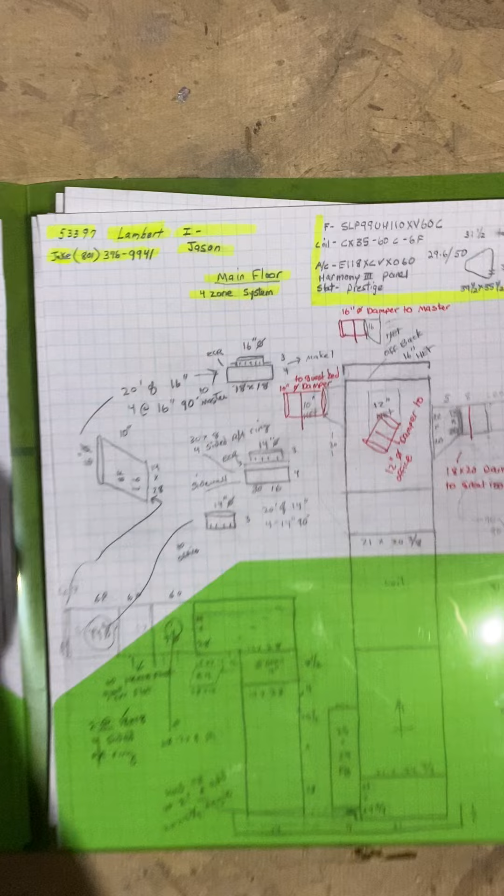Okay, this is on the Lambert job, number 53397, installed by Jason. Main floor and the basement. This is a Magleby home. So I'm doing the main floor first.

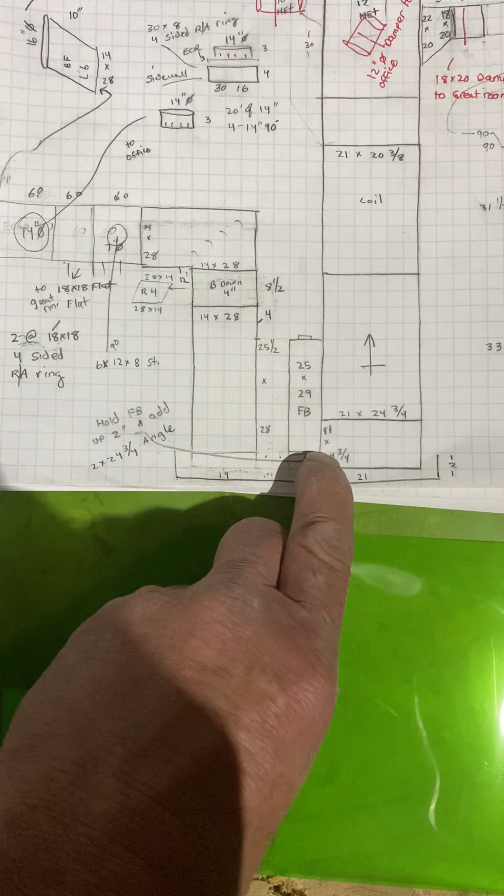The existing furnace is right here. The new one is going to turn and face north. Okay, so we're going to have the furnace, 25 by 29 filter box. It's going to sit on an 11-inch base. Raise the box up 2 inches so we can change our filter. I'll make you an angle right there.

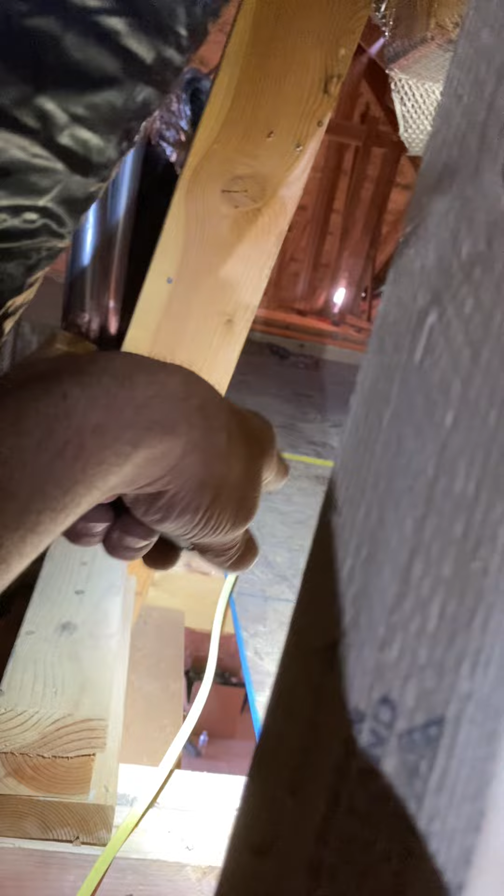Then you're going to have this 90. Going to offset back 4 inches right here, and then the 90 on the top. And your ductwork should sit back 4 inches right here, tied against this wood. And you just have straight duct, I forget how long, but to the back there. Then you have a square-to-round, and run one return,

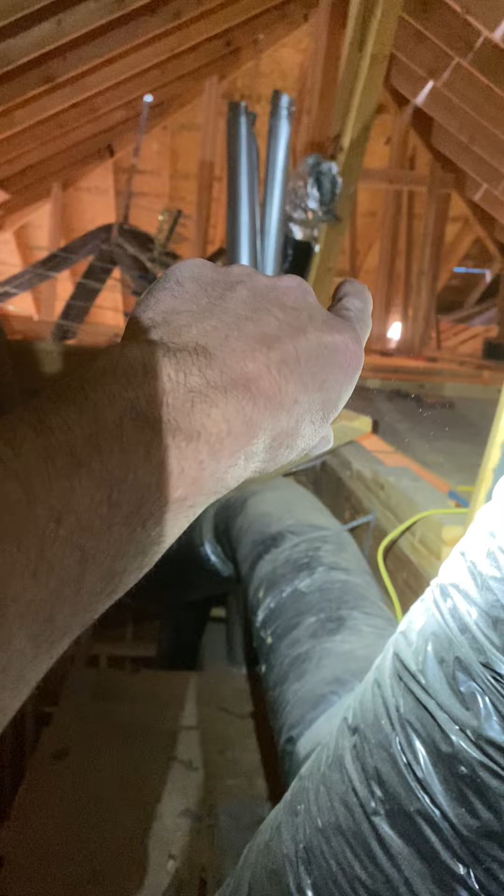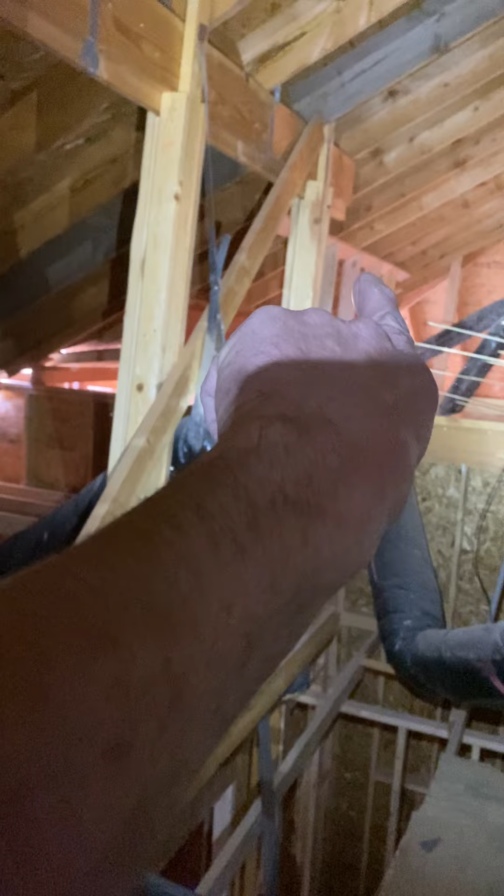14-inch up the end to an 18 by 18 flat grill in the great room. And you run another one to a sidewall, high, 30 by 8 sidewall flat grill, high. And I just gave you a big pan, so just ductboard the headers.

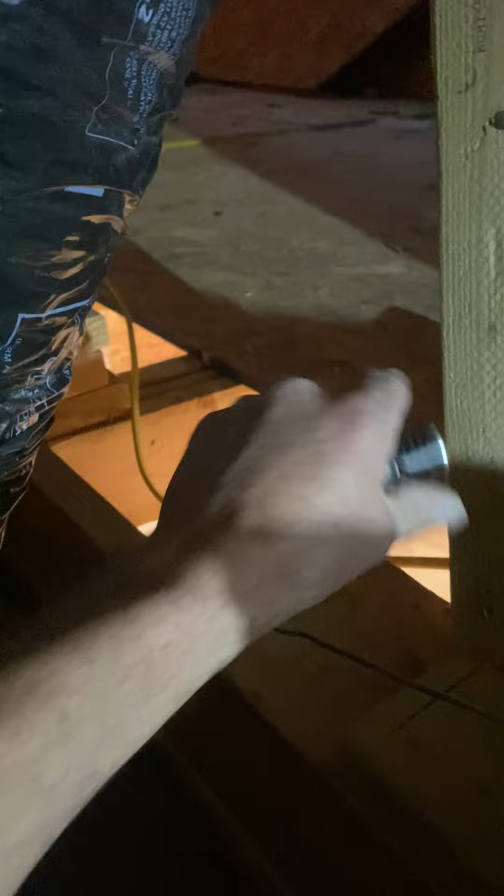You'll have two 18 by 18, so you're just going to cut out the bottom of the duct and cut out the bottom of the floor and put two 18 by 18 4-sided return air rings down and put ductboard on both sides. Okay, so this is a 4-zone system. Duct just as it shows.

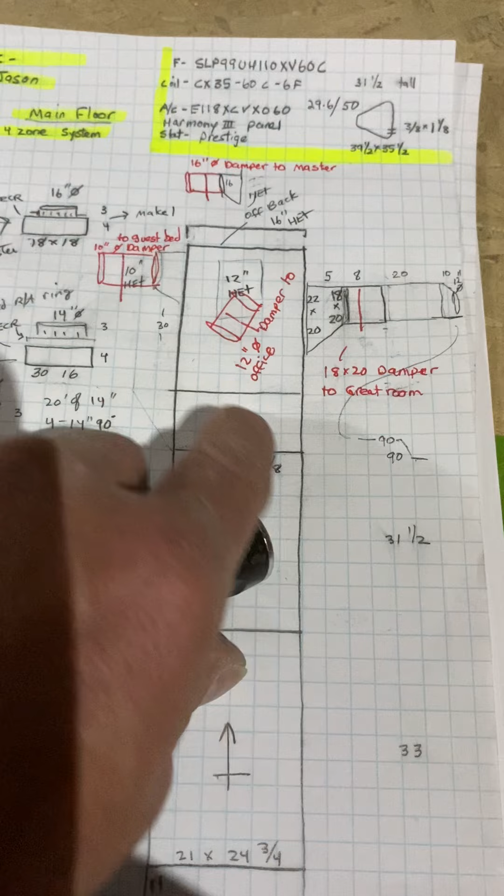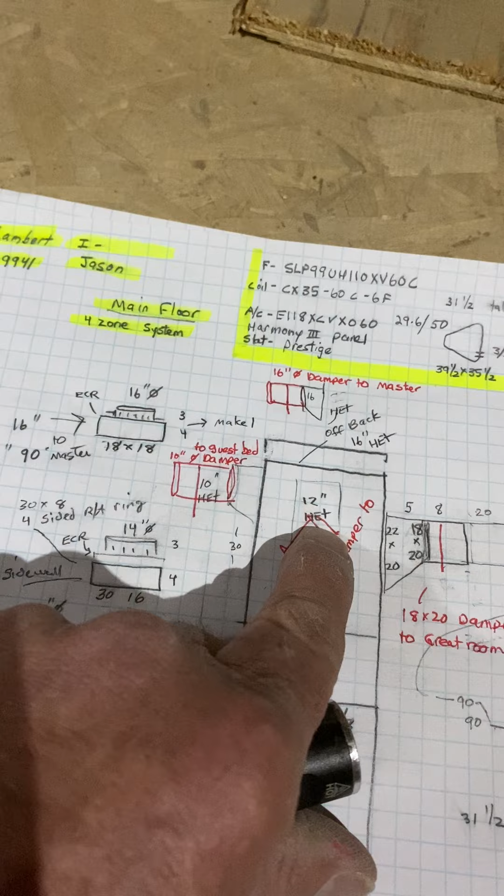Let's see, what is this? Oh, I'll have to erase that. I changed my mind. This is just one piece, 30 inches tall. But you have a 10-inch HET going this way with the 10-inch round damper. 12-inch HET coming up the front with a 12-inch round damper. A 16-inch HET coming up the back with a 16-inch round damper.

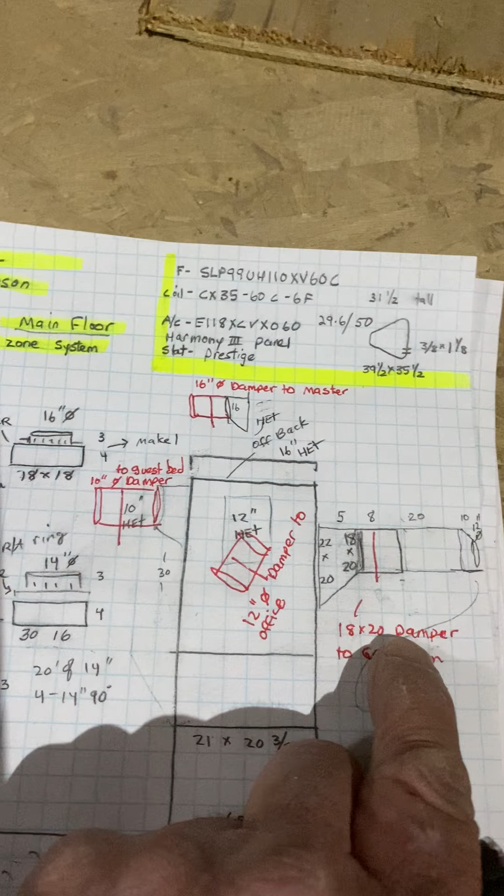Here you just have a 45-degree starting collar and an 18 by 20 damper here. Then I have a little piece of duct, then a square-to-round, and you have to kind of put a 90 and angle down, because the roof comes like this, you know.

Quick question on this washer dryer.

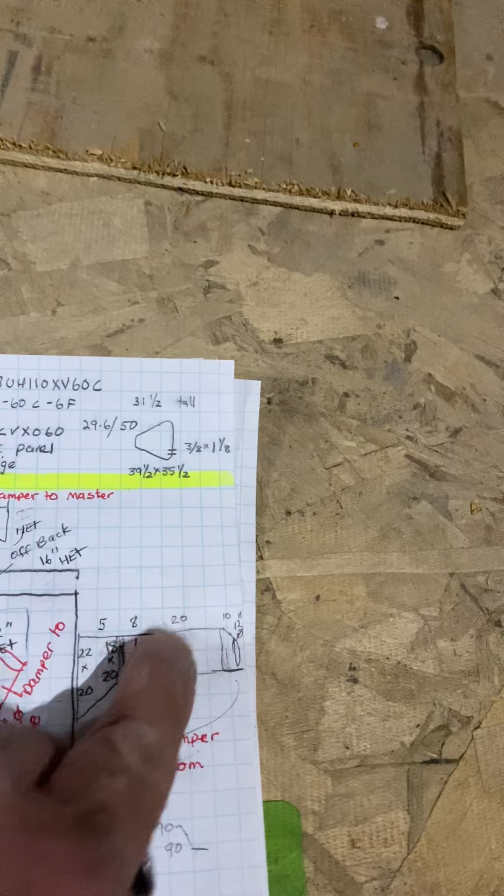But, and then coming off this back side, you will have a square-to-round starting collar to go to all the great room. Okay.

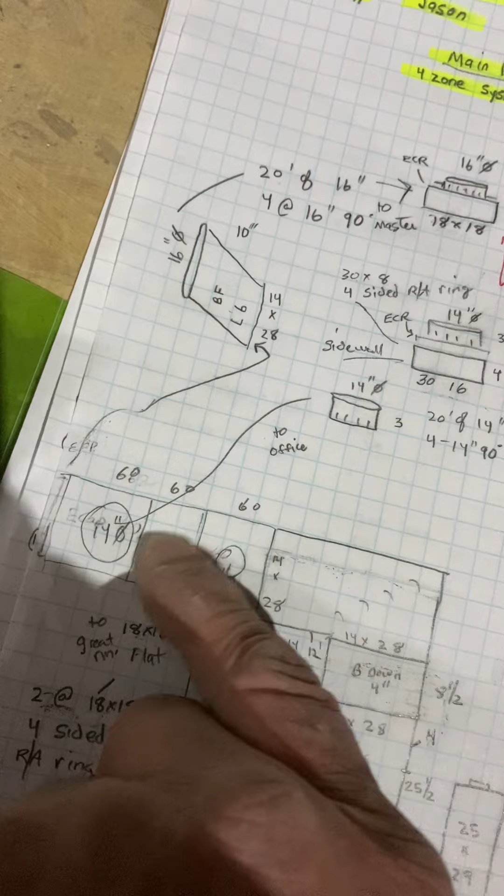So return air: 18 by 18 to master, 30 by 16 to the office, and then we'll just have a 7-inch round going to the bedroom return to a 6 by 12. I think that's what I wrote. Yeah, 6 by 12 by 8 straight boot. Everything up here is hard pipe. No flex on this job. So combustion air not applicable.

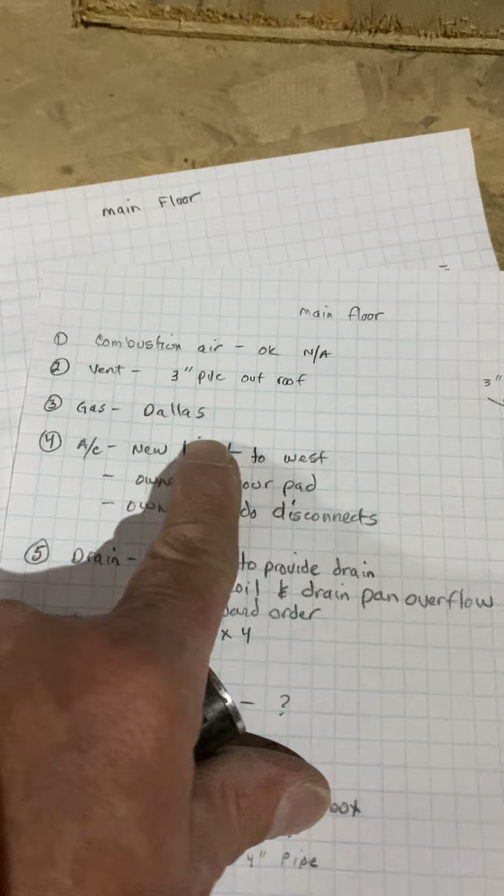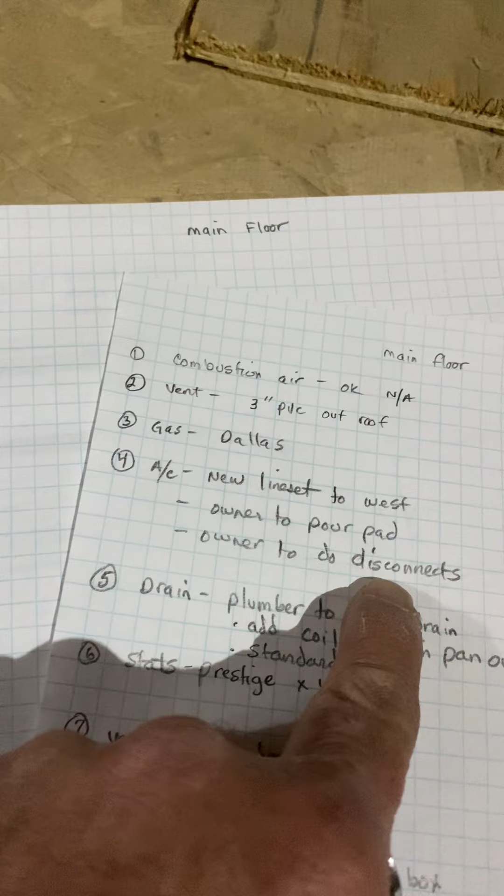The vent, 3-inch PVC through the roof. Just gonna take out this and you're gonna run ours to a concentric with the new roof flashing and stuff. The gas will be Dallas. AC, have to run a new line set to the west, over and then down the wall. The owner's gonna pour a pad out there. The owners will provide the disconnects, electrician will.

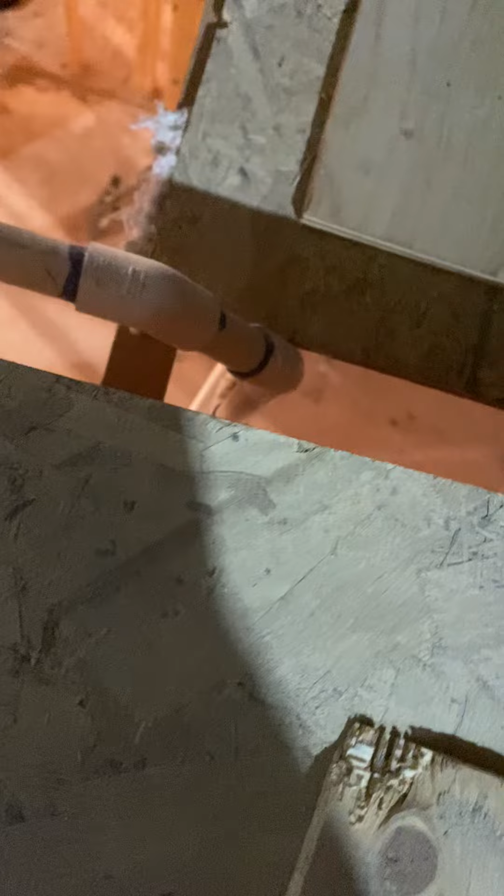The drain, so I talked to the plumber. Right now we just have a 3/4 inch drain going down right there. I told him we'll have a drain pan and everything. He's gonna bring us up a 3-inch P-trap so we can drain our drains into it. Add a coil and drain pan safety overflow switch.

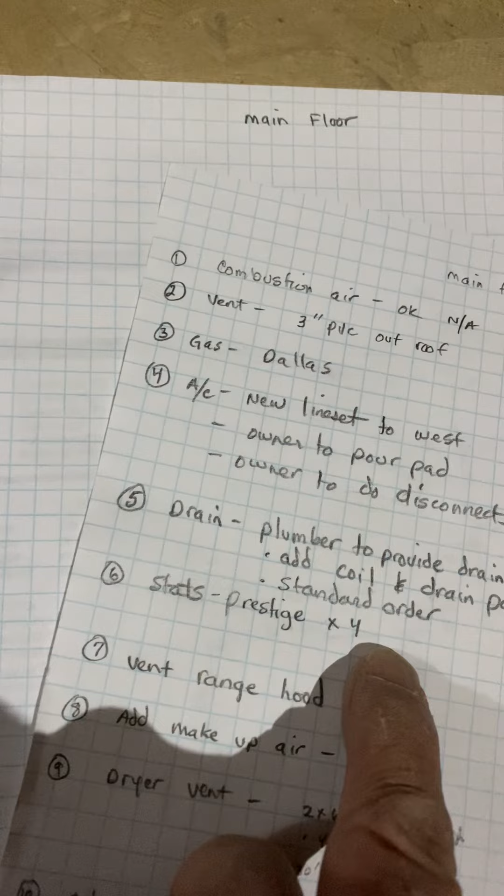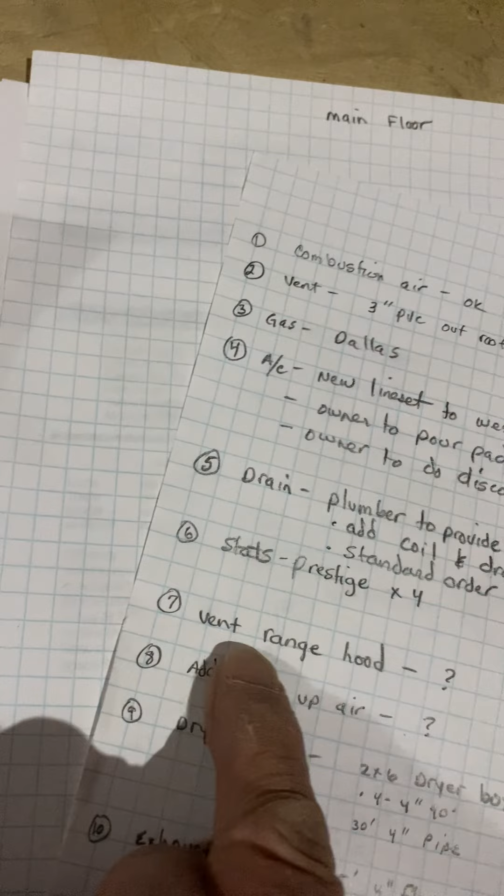Thermostats, 4 Prestige on each furnace. Gonna have a Harmony 3 zone panel. Vent, the range hood. I don't have any information on that. We don't know what size it is. Or the makeup air. I don't have any info on that either, or what we're doing, so.

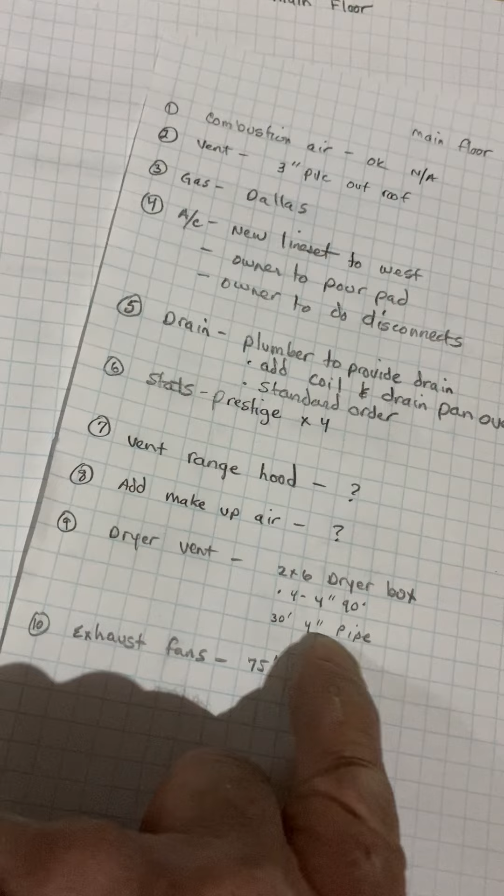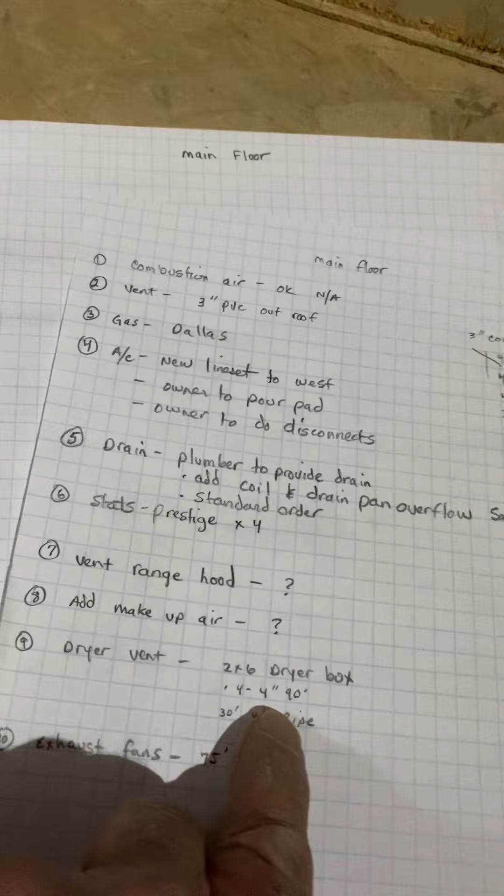Dryer vent, I'll give you a 2x6 dryer box, some pipe and 90s. I'm not going to order you the outside terminations because I'm not quite sure what they want, so we'll order those as well as the grills on trim out. I don't want to order grills and you need to change things. Exhaust fans, I'll just give you 75 feet of 4-inch flex and run the exhaust fans as needed. So, okay, let me put this back together and we'll go downstairs in a minute.

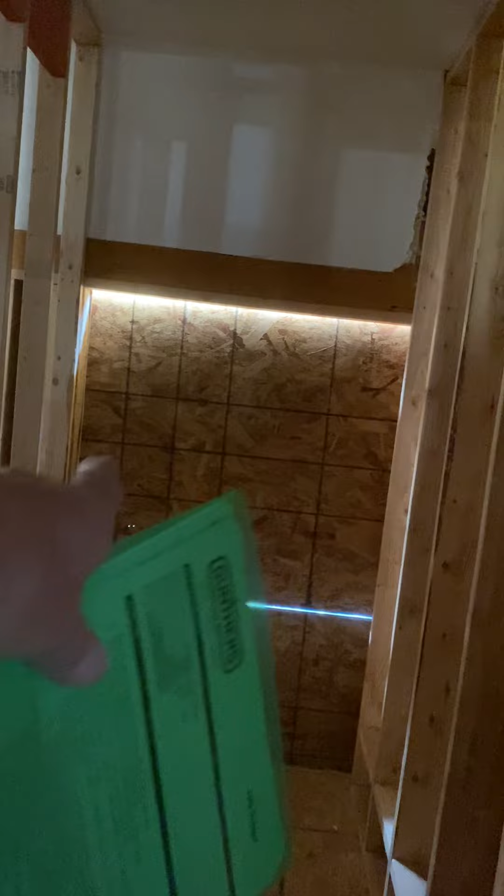So just so you know, on the plans it shows a room out here. They just haven't built it yet. It just goes outside right now, but there will be a room here. So hopefully it's built by the time we get here.

But in this room here, the guest bedroom, they're going to have a bathroom here. They kind of reorganize the wall, so they're gonna put a shower here.

Turn on my dang light again.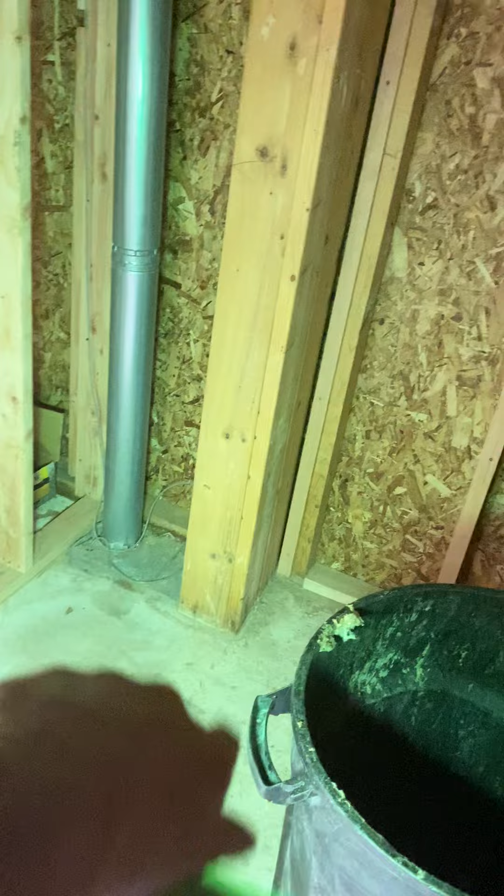They're gonna put a shower right here, and they're gonna extend this wall wide, so we can get our 3-inch flues, and the plumber can get his 3-inch flues for his water heater, all the way up and out through the roof.

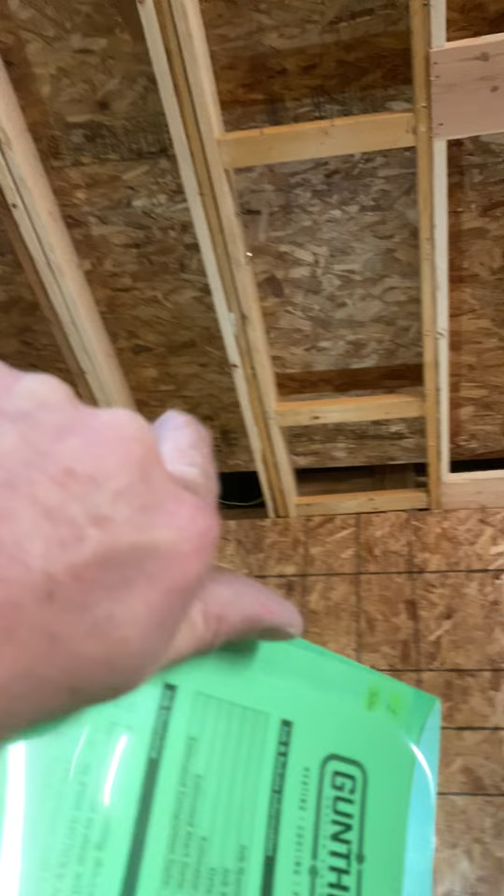So this is the great room. Over here we're just going to have, wherever it's feasible, 2 18x18 flat grills. Return air rings here. Cut out the bottom and you can put headers and pan. And then this on the other side of here is our master bedroom.

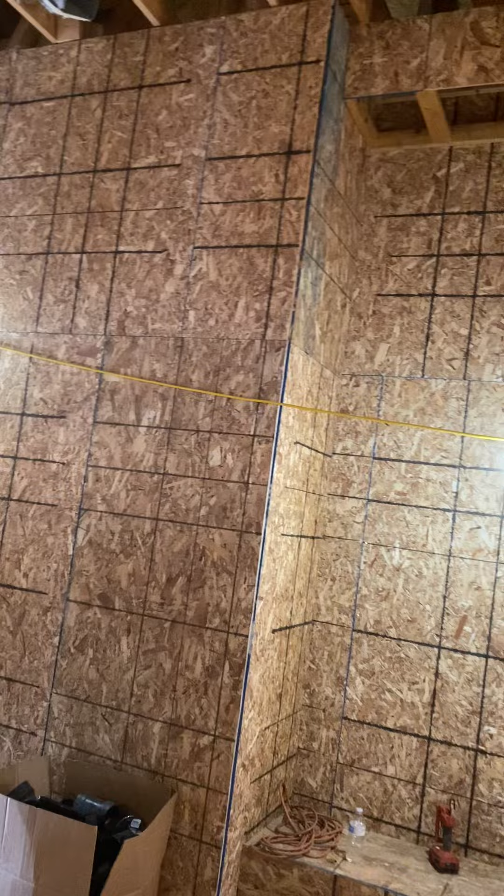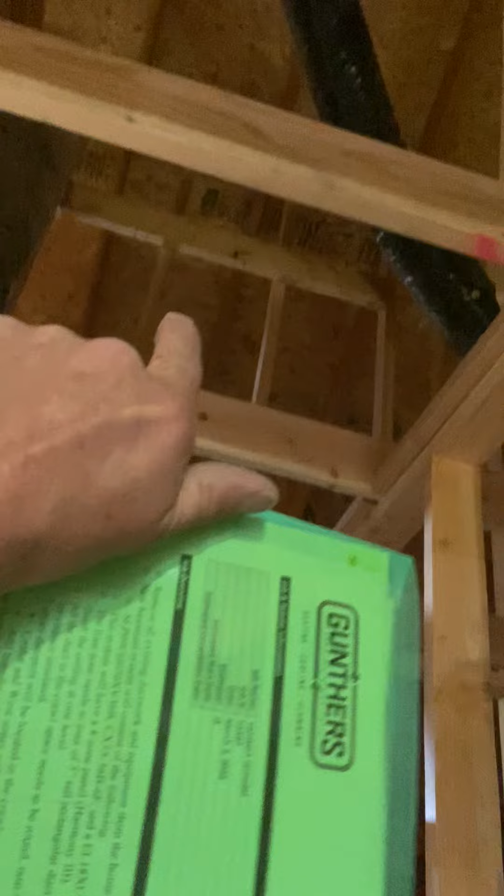And this is the office right here. So our 30x8 flat roof grill will go as high as feasible here, and hard pipe over to our return. Over here in the master bedroom area, we'll have an 18x18 box. We'll make you a box and 18x18 grill there.

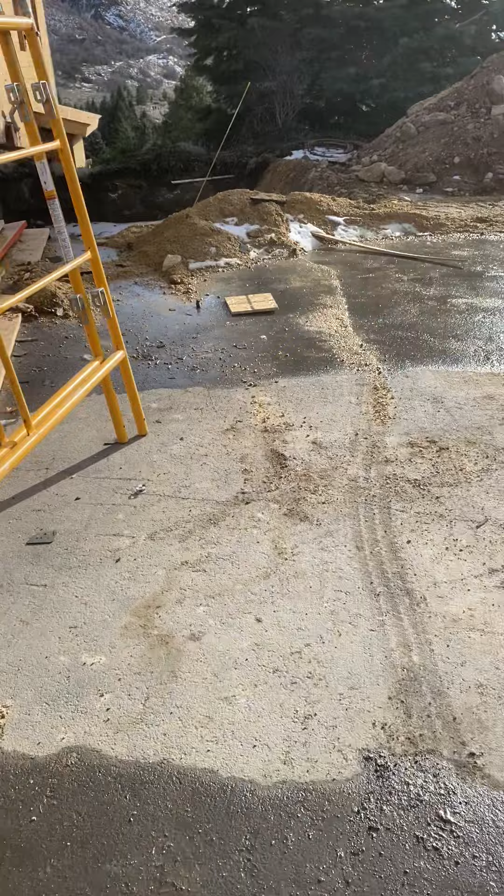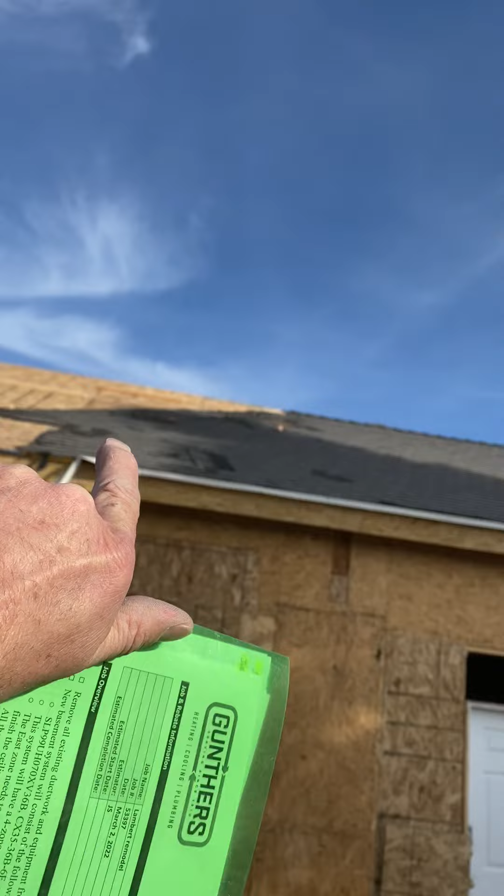Okay, let's go down to the basement. So the ACs will be sitting on the west side. This is the room that they're going to build. The mud room, I think is what they call it, but it's not built yet. But you can see our old flues, and so we're going to have 2 concentrics coming up wherever, and the plumber will have his coming up.

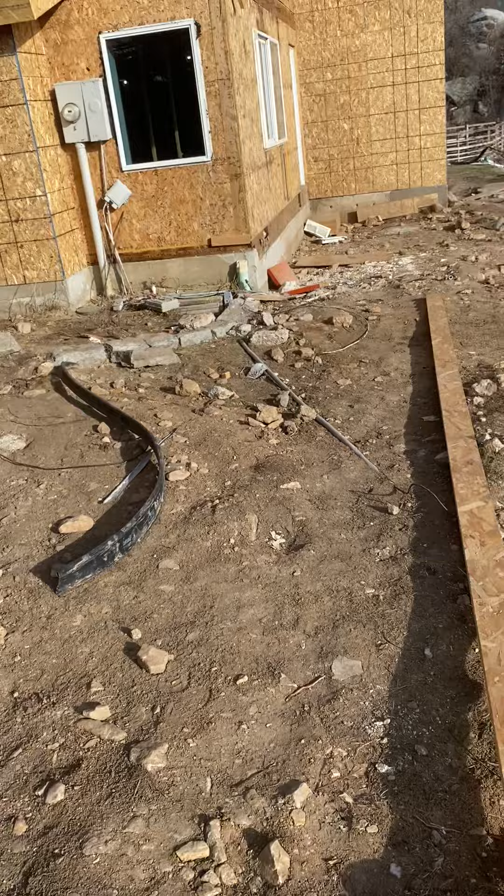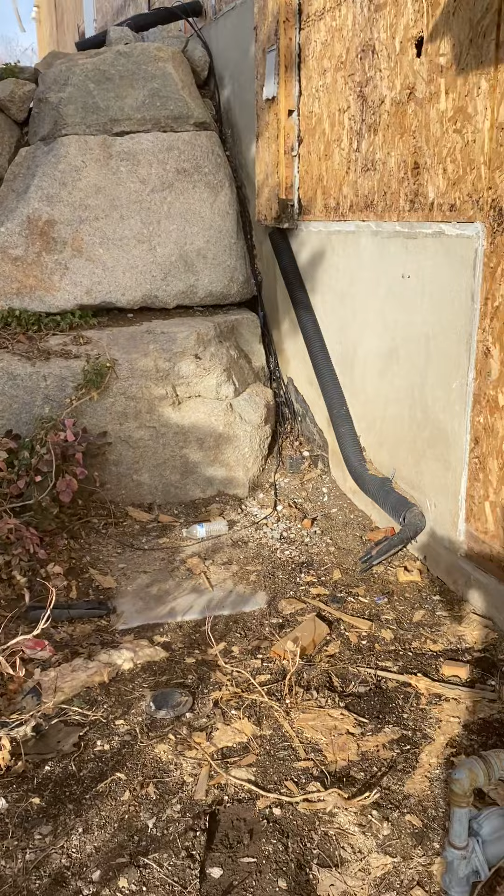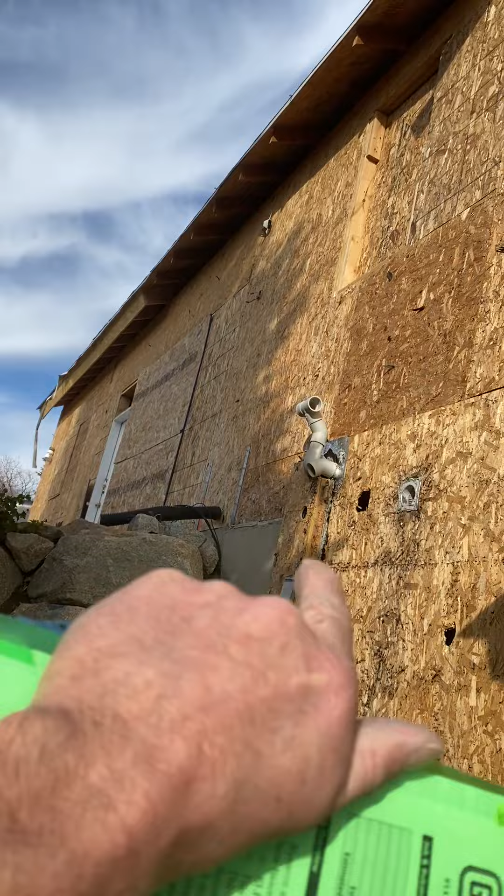Okay, so our ACs will both sit on this west wall. The builder's gonna pour a big pad here, so just keep in mind clearance from your gas meter, and lay out your disconnects, of course. But yeah, just stage your ACs where they work the best here. This basement flue is ripping out. Okay.

Okay, so this is the basement furnace. Our new furnace will sit in the same footprint as that one, and ductwork as it shows. So the furnace will sit on a base, have a filter box. We'll have a 90 coming back, 90 going back towards the wall, and then we'll have a T with a piece of duct and an end cap right before this wall, and a piece of duct and an end cap.

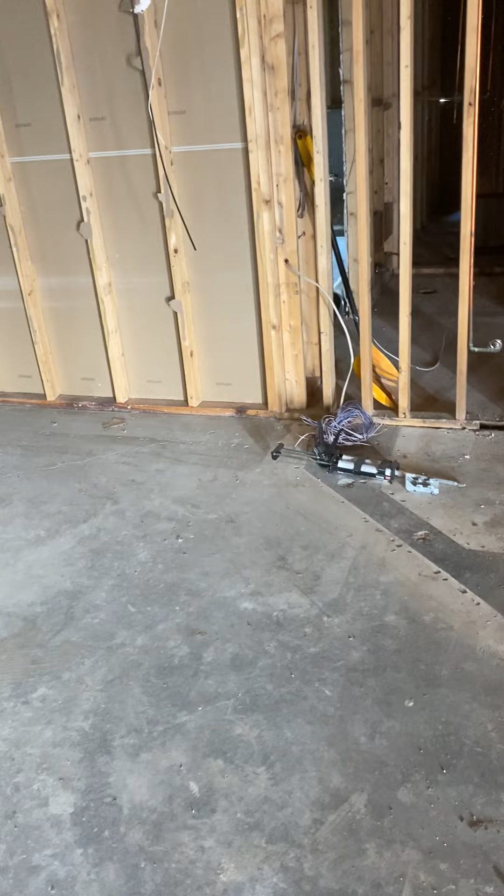And we're going to cut out the back side of this return air and put 2 30 by 12 baseboard grills on this wall. Other than that, that's all the return this is getting, other than it's going to get 3 transfer airs out of the bedrooms. And I made them an 8 by 14 baseboard low and a 6 by 14 flat grill high. Just use the wall stud space.

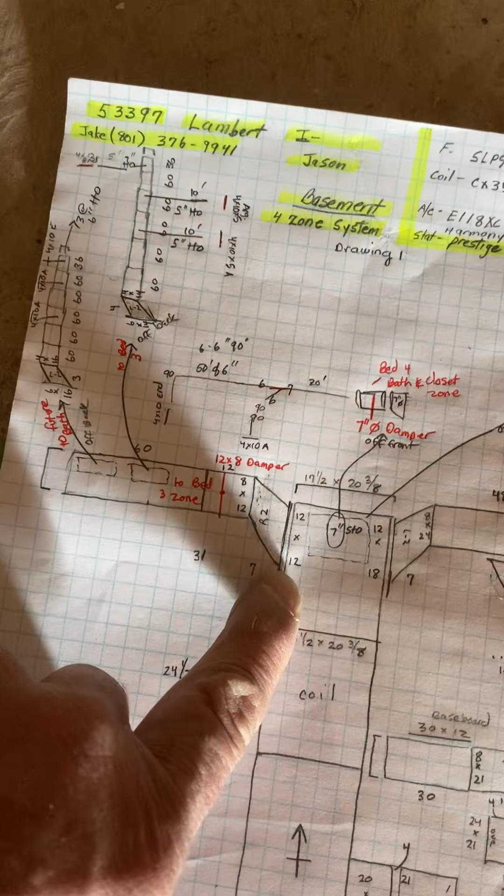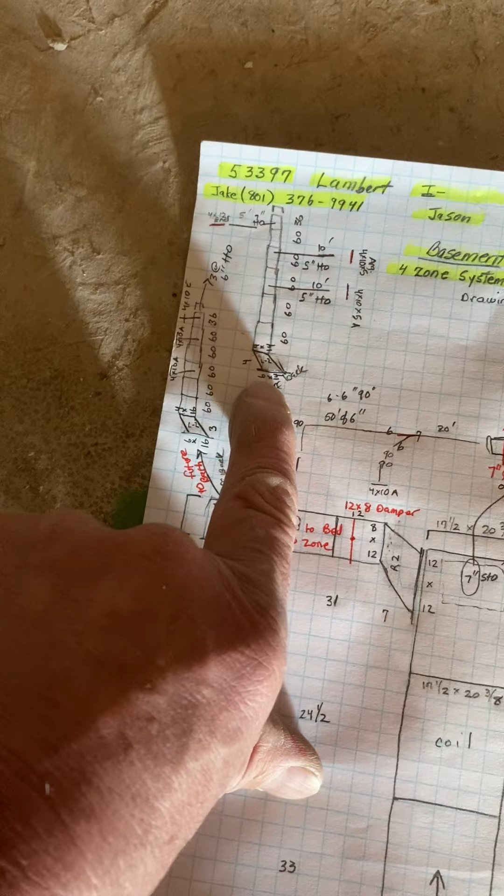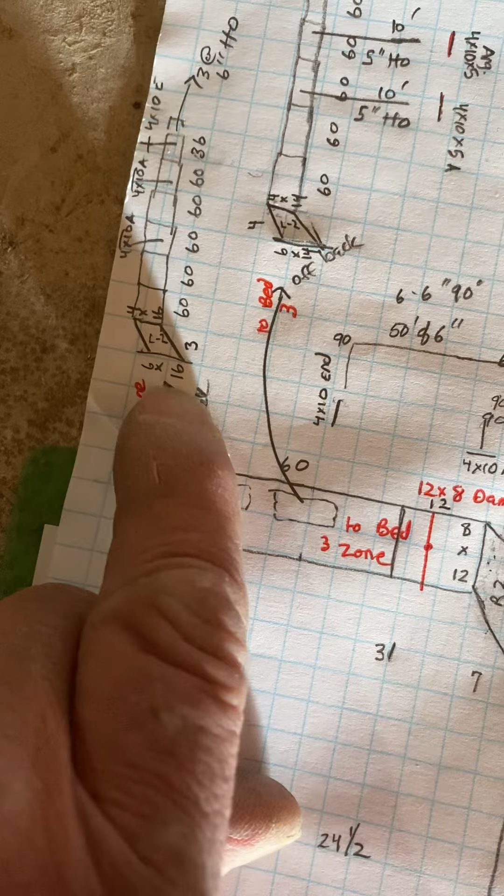Okay, so up here I've got a starting collar. And then off the back here, I've got 2 little pieces of duct. This one's a 6 by 14, I think. Let me read that. 6 by 14. This one's 6 by 16. And then they reduce to 4 by 14. Sorry, they're just starting collars to 4 by 14s.

And we made them so small because this here is 5 inches. The builder told me our duct can't be bigger than 4. He wants to fur this whole ceiling down the same as this. So the whole thing will be furred down 5 inches. So this whole room, as well as this whole bedroom here, will be furred down the same as well.

So our duct can come off wherever it's feasible, wherever you want. First one just come off probably closer to the furnace and run straight down. And just take your takeoffs off the top, just like normal.

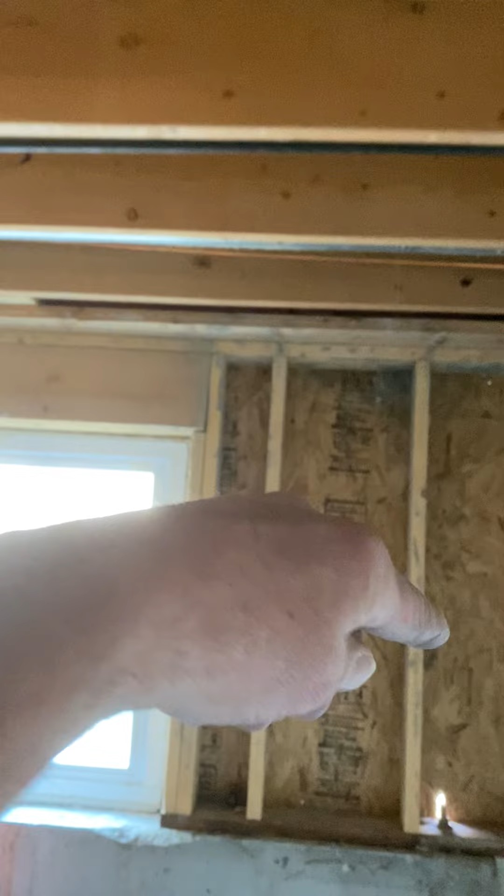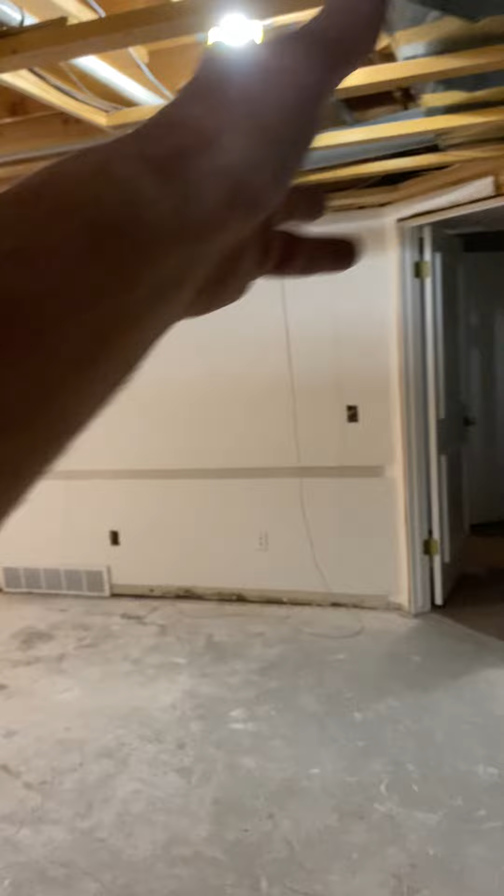Take off the top to the bathrooms, and then one takeoff off the top to our vent in the window. The other one's just going to come straight down wherever feasible. They're going to get rid of all this, but this is a bearing wall, bearing point right here, so all this has to stay. But anywhere else you can come down.

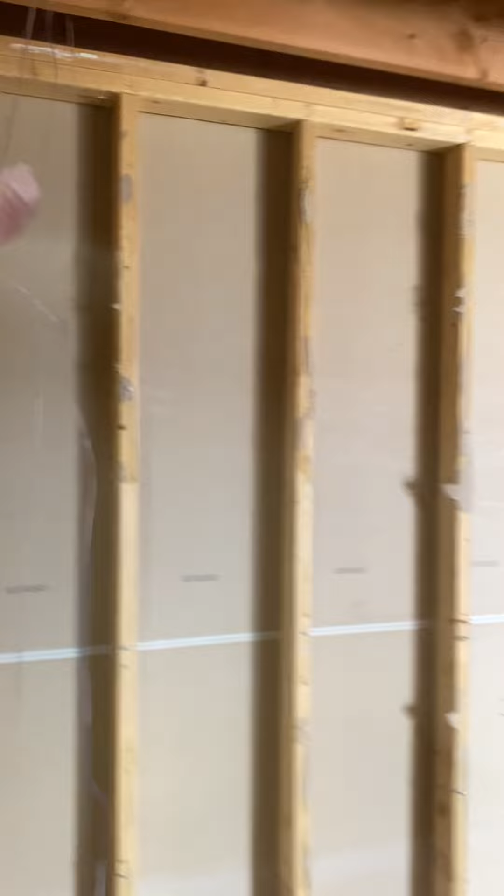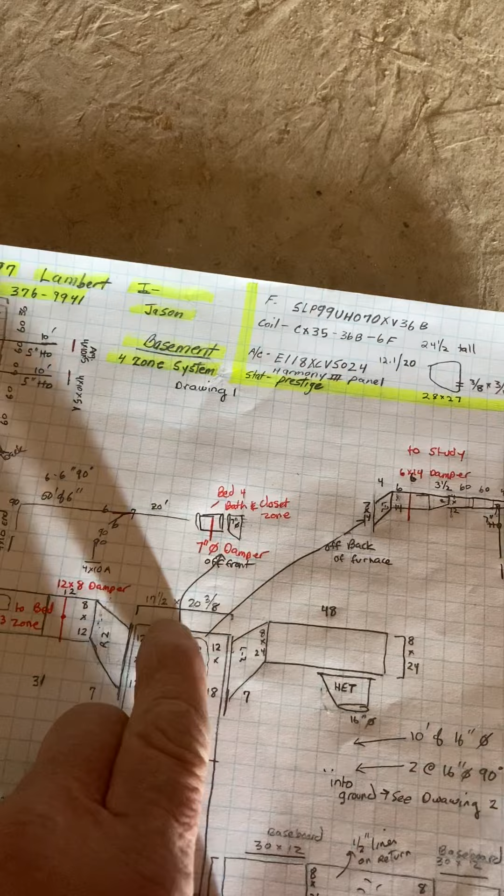So just come down somewhere down here and take your takeoffs to the bathrooms, future full bathrooms. There, just off the top like normal. Okay, so off the back we have a damper. Sorry, a little short takeoff with a damper, and it's super tight there.

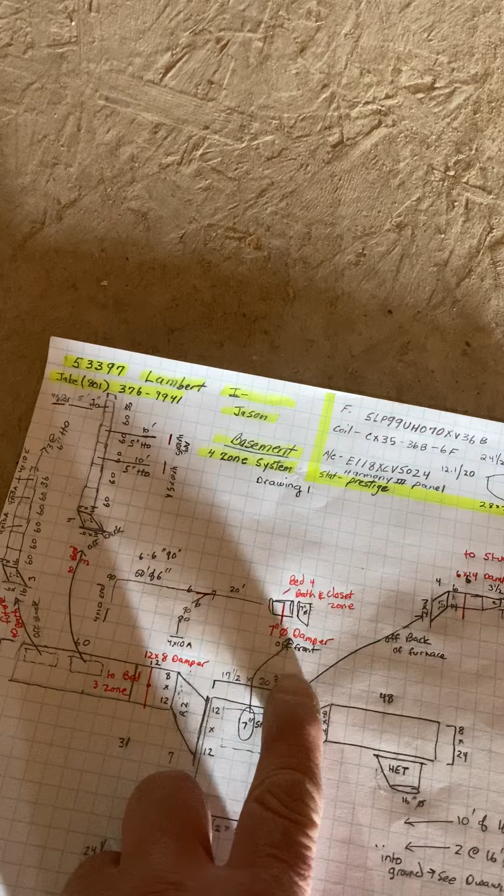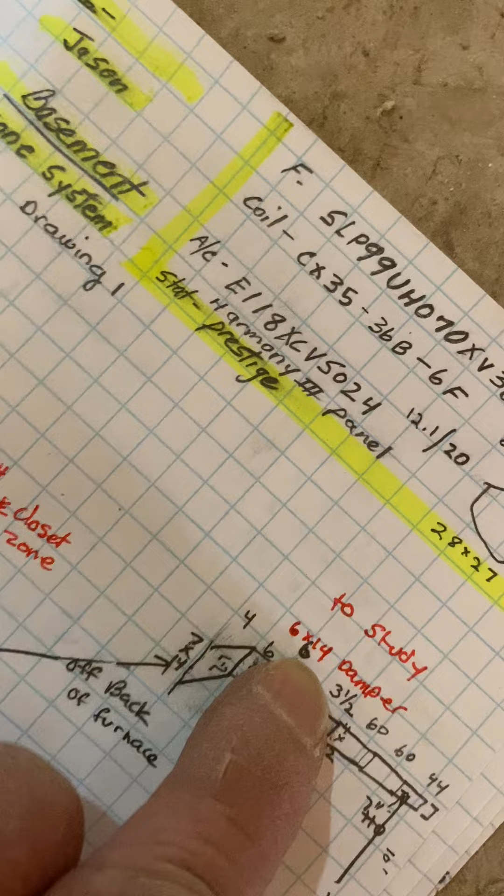So we have 9 inches behind the furnace. So you're gonna have to kind of mess with that, and let's see, where is it? Oh, it's over here. So I made that 4 inch, and then this will just be a 6x14 piece with a damper, 6 inches long, so it's gonna be corner to corner. And then this little fitting will be 3.5 inch, a 6x14 to 4x12.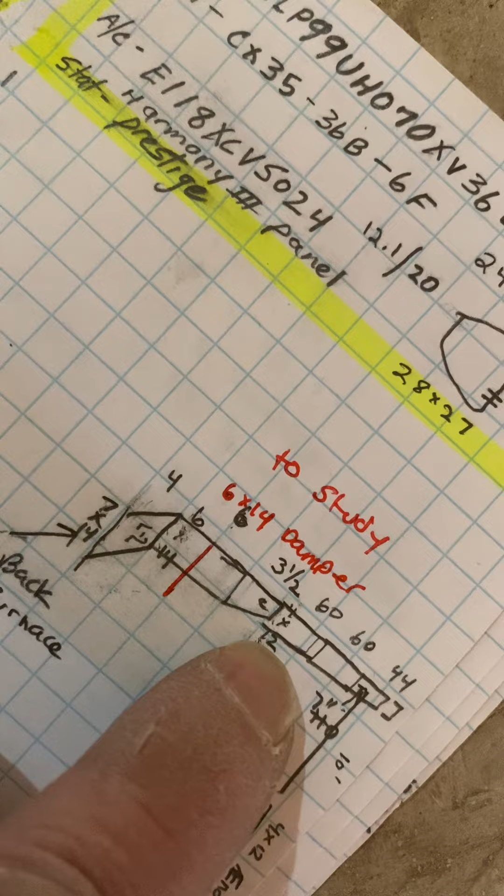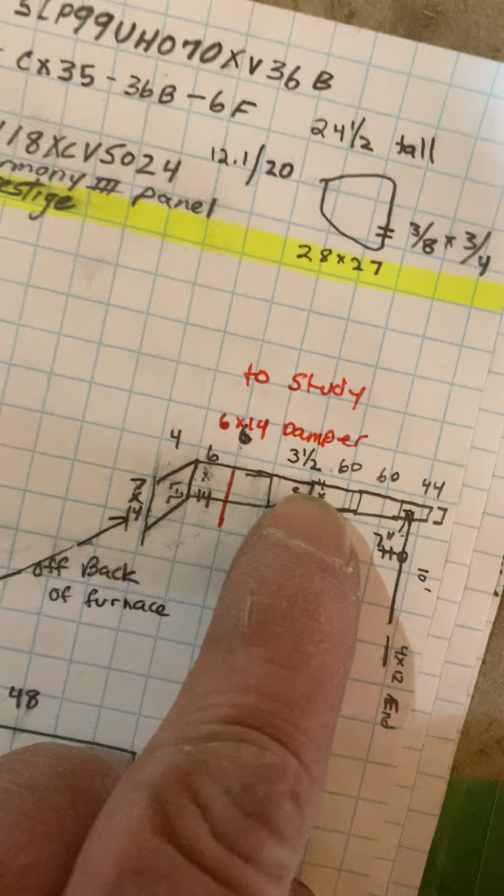Sorry, to 4x14. I was going to make it 4x14. It will be 4x14 all the way down. Just a second. And this will actually be inside that 2x4 wall. Okay. And then I'll just go to a bend in this room.

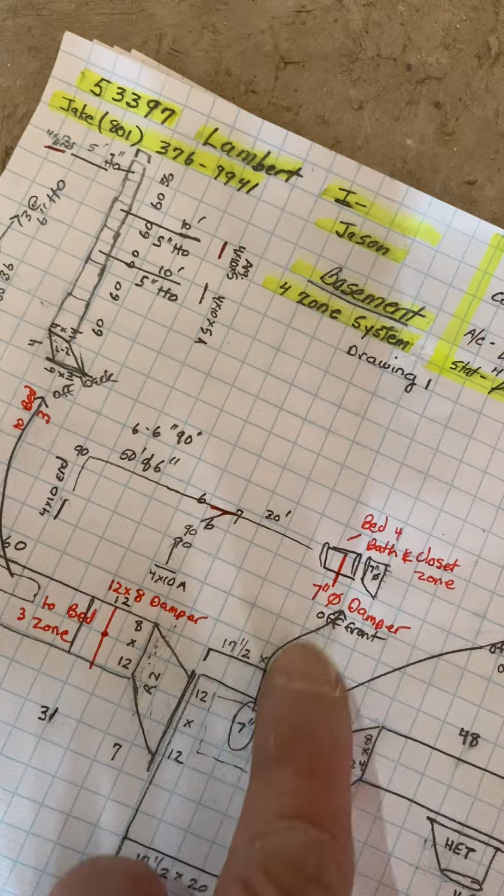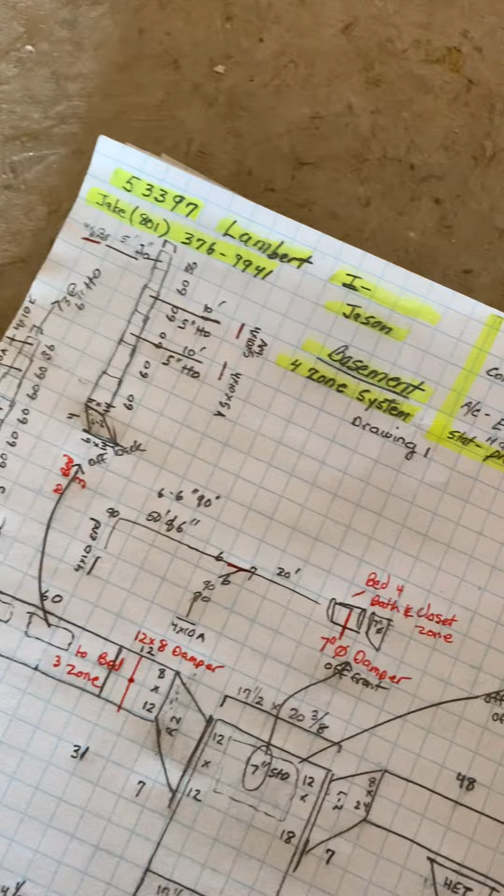Okay, coming up the top, off the front will be a 7 inch side takeoff with a 7 inch round damper, and 7 inch down, that's just Y as it shows. Okay, so the tricky part about this job is, I made 2 drawings.

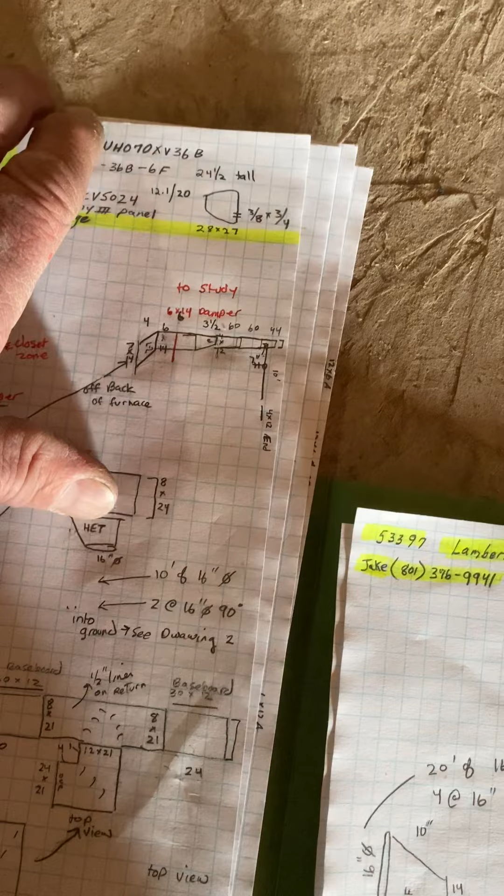This is the first one I drew with a 16 inch round. Then we're gonna go 16 inch round down and to the underground, and then do all the Ys and zone dampers and everything in the crawl space. But we kind of changed it, so this is the new one. So we're going to have 3 takeoffs off this right supply,

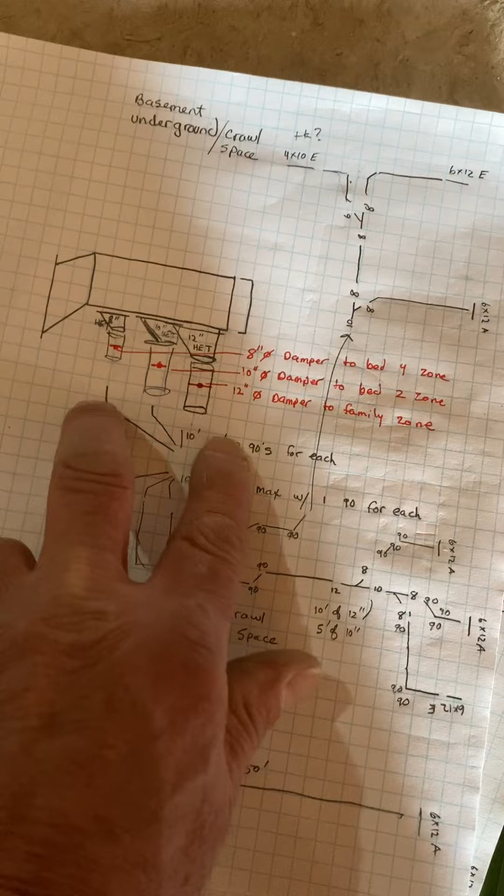and just as it shows, this will just be hard pipe, and I give you some 90s to get where you need to be. And then this will be the Fat Max underground pipe. So we're going to have a 12 inch, a 10 inch, and an 8 inch round damper coming off here. And then you have the Fat Max pipe, underground plastic pipe coming down, 3 of them.

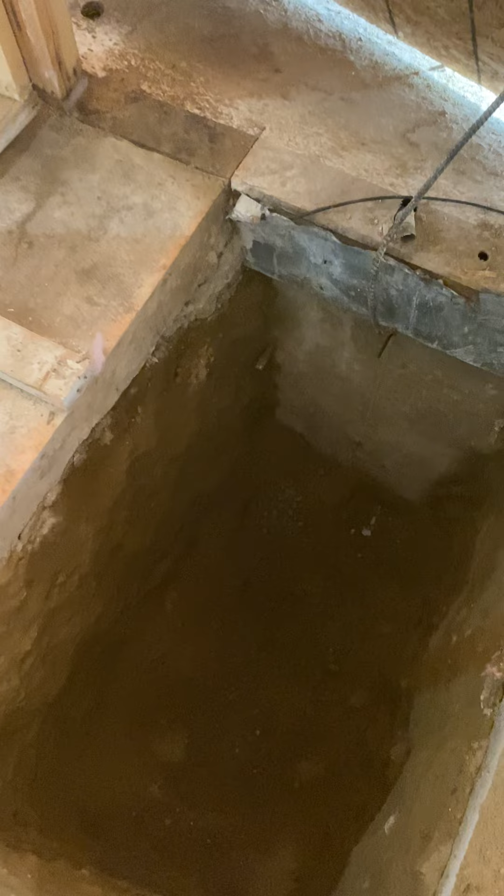And he's going to core drill 3 holes. I told him 2 inches bigger than each run, so you should have a 10, a 14, and a 16 inch round core hole. 12, 13, 14. Did I say that right? Well, you get the idea. Let me just tell you again. Should have a 14, a 12, and a 10 inch core drill hole. And I told him just put them where he can, and we'll just come out where we can and tap onto it.

So this whole side is cement. This whole side is a crawl space. So underneath, just as it shows, it's all going to be hard pipe. They're going to have to encapsulate and all this. But this is like a 12-foot crawl space, so you actually need a ladder under there to work. And just duct as it shows. Okay.

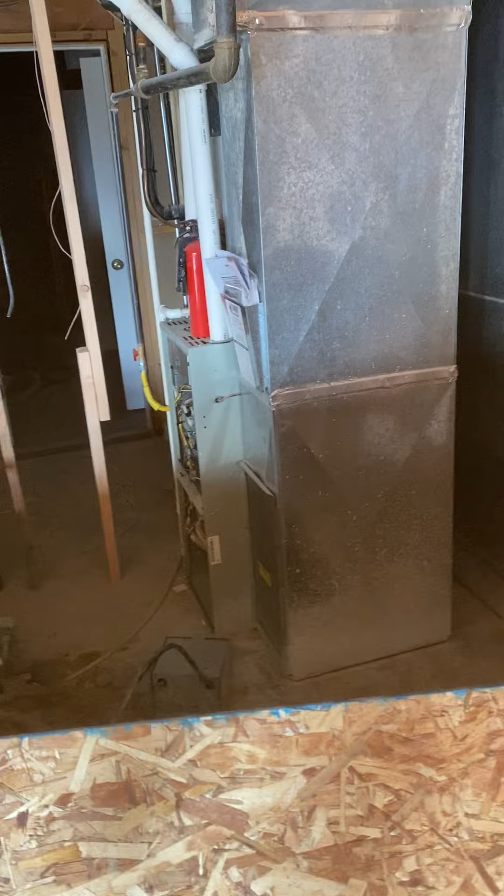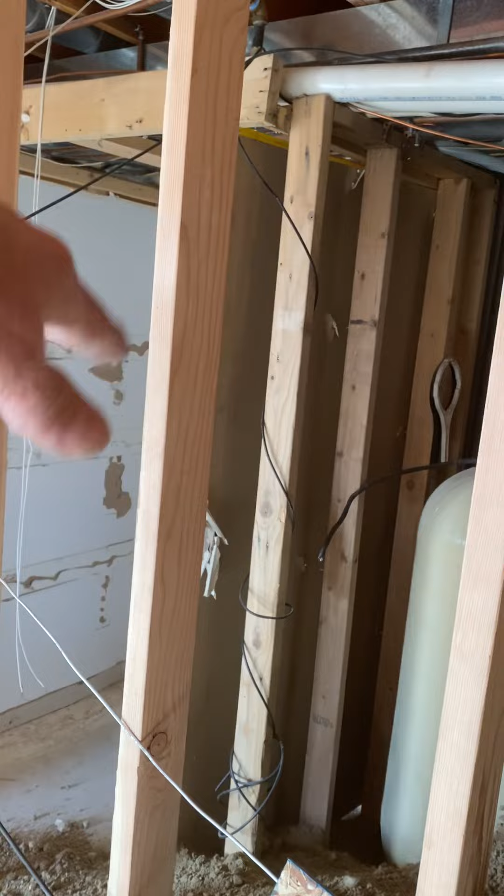So your flues, sorry, combustion air not applicable. Your flues will go up the bathroom and up through the roof, 3-inch PVC, as well as the water heater flues that the plumber will run. The gas will be done by Dallas. The drain will go to the floor drain over here. Floor drain right there.

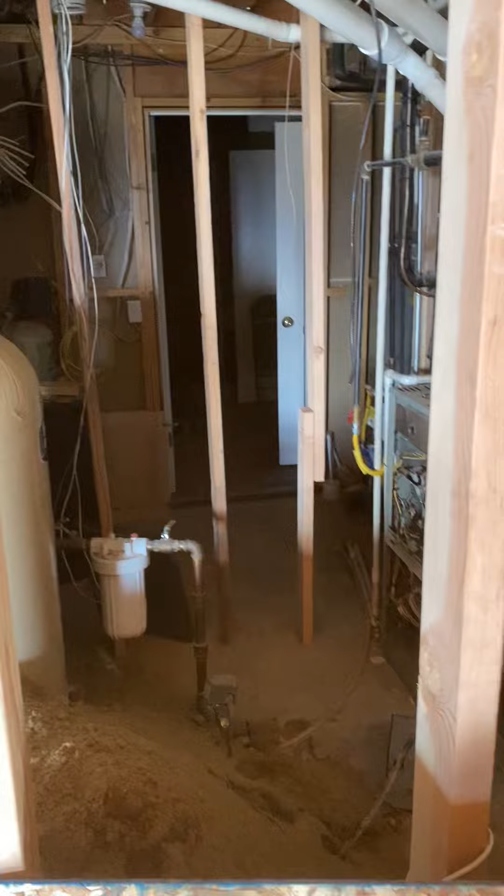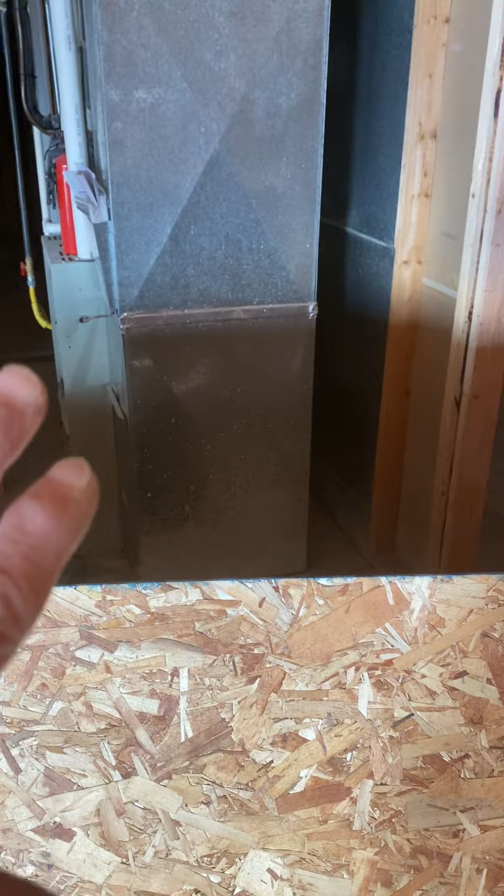The ACs, run new line set out and down to your ACs. We talked about that already. Thermostats, you have 4 Prestige stats down here, as well as a Harmony 3 zone panel. And what else? I think that is about it for now. Thanks.